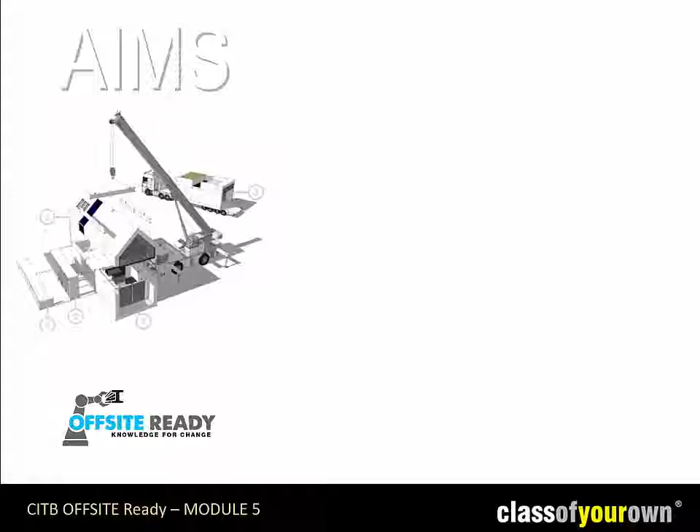The outcomes behind this module are to enable students to understand what AR and VR are, and then we're going to look at Sefaira, which is a sustainable environmental program.

The objectives regarding VR are to understand what the origins are, to explain how virtual reality works, and to demonstrate the benefits.

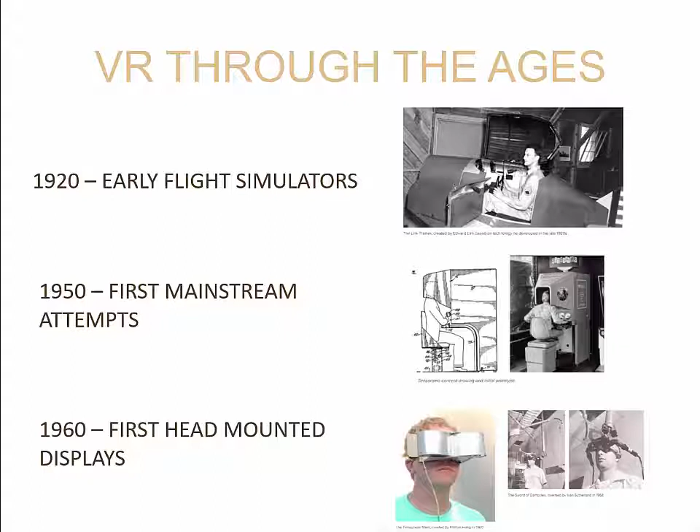This was developed for the first mainstream attempts back in 1950. Then in the 1960s, the first head-mounted displays started to emerge. But it didn't really become a real thing until the 1980s, and then that evolved into VR and gaming in the 1990s.

And finally, rapid development started very much from 2000.

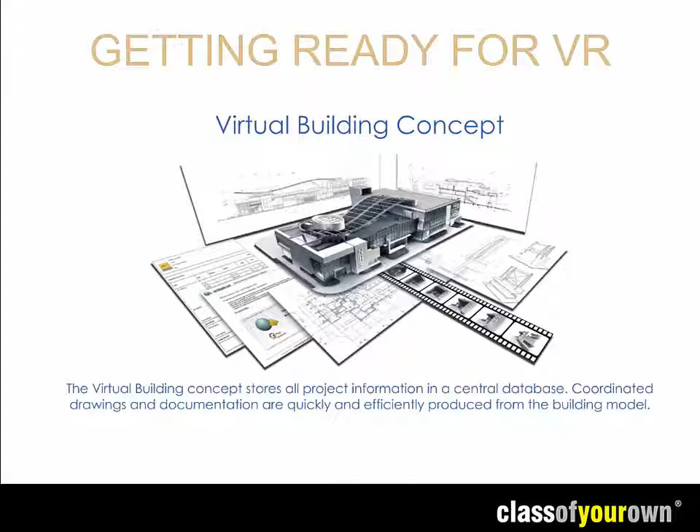So why do we use it? Well, we have the virtual building concept, where no longer are we relying upon 2D illustrations to communicate our ideas. Now we can take our models and provide the facility for them to be explored both externally and internally as a way of communicating information.

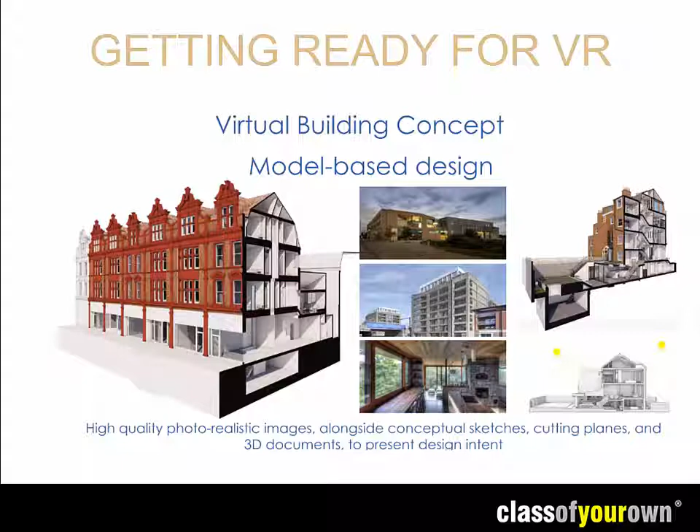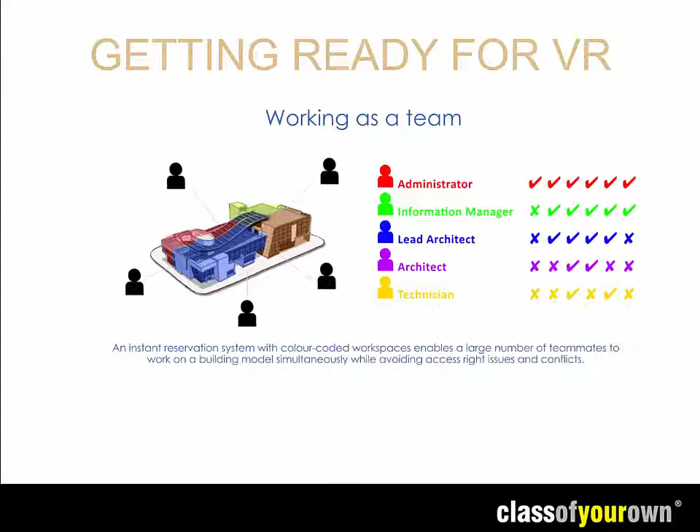In this real-time collaboration, what do we need? Obviously we need the BIM cloud, but more importantly what we require is a team, consisting of the designers, the engineers, and the client. So no longer do we need to work in independent cells, we can work in a group from anywhere around the world.

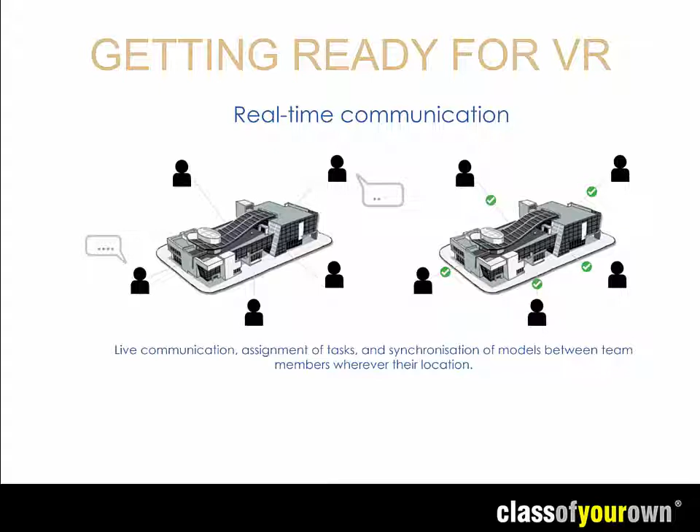So how's this working? Well, we have various options of how we can communicate. The simple one is the Google Cardboard box. There are good elements behind it: it can be easily branded, easy to share, and it's ideal for clients. The downside, however, is that it requires a smartphone, there's no audio, and it's cheap - it's entry level.

Stepping up a gear, we have e.g. Gear VR. These cost around £150. The good element is that they are lightweight and easy to use. We do have a wide angle view, but the bad side is that it's still relying upon smartphones for the ability.

More sophisticated versions are the headsets, where we have built-in audio, high quality images, and it's easily interactive. But the situation is it is tethered to a PC, so it's not so flexible, and it only works on a PC.

So what do we mean by QuickTime VR? Literally, it's a type of interactive movie that supports the QuickTime file format. We have two types: panoramas, where we have a single view and the environment is revolving around us, and the other option where we have movement, so the camera moves around the object, allowing fly-throughs and going in and out of buildings.

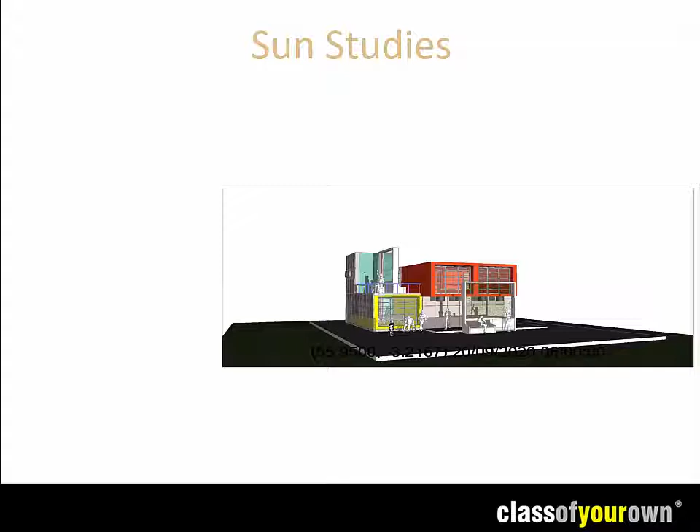More sophisticated developments are where we can take our model and start creating sun studies. By setting up our settings and moving around, we can simulate the daylight so that we can check out how our model is set up regarding how light penetrates the building, and not only that, but how the building impacts the neighboring properties.

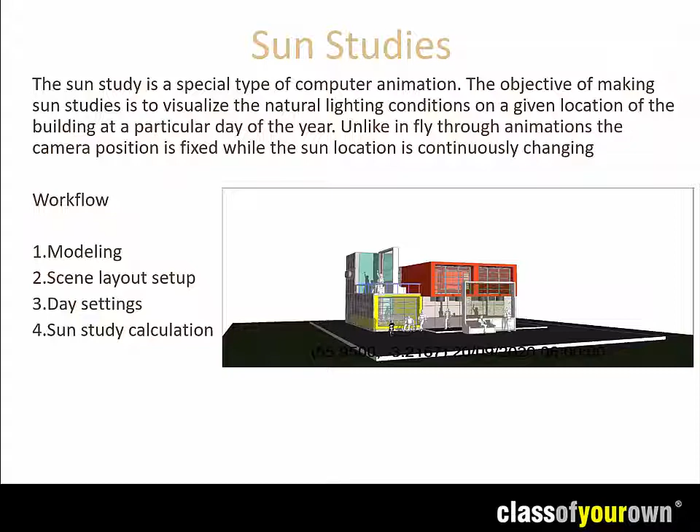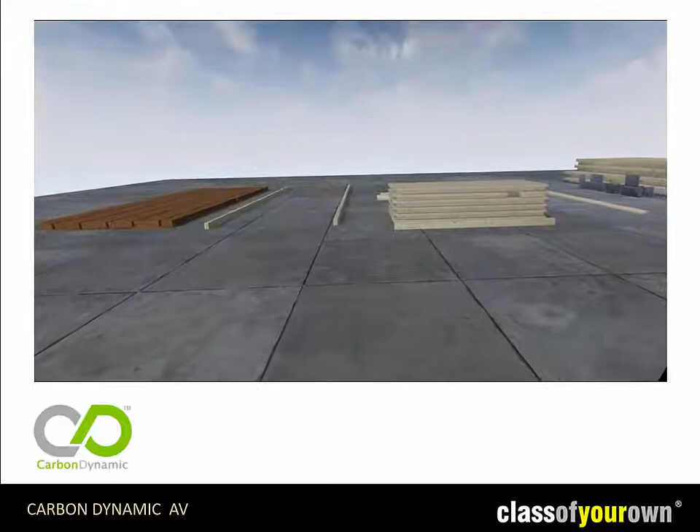Before we move on to part 2, I've included information from Vimeo videos which have been created by Carbon Dynamic. The principle behind each video is to illustrate the process that they incorporated in order to try to create their offsite.

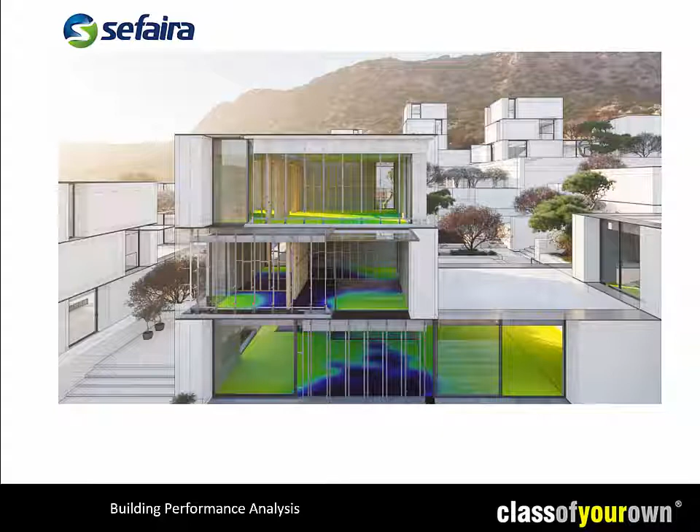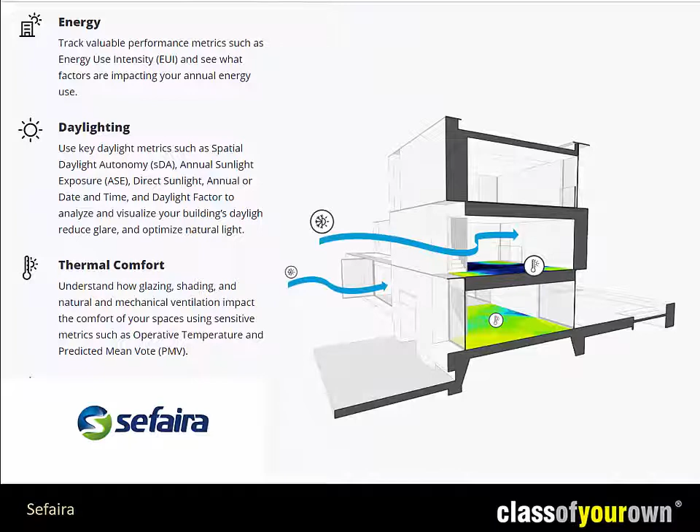So, Sefaira. Sefaira is an application that works with SketchUp. It also works with Revit. The principle behind Sefaira is to enable us to make building performance analysis, so we can make smart decisions from the early stages of our design right the way through to completion. So we can analyze the energy, we can analyze the daylight, and we can analyze the thermal comfort.

So the whole principle behind analyzing is that we need to simulate early and analyze often. The study enables us to make decisions regarding the alternatives available to us.

Sefaira is part of Trimble. There is a direct link to learn.sefaira.com, which takes you through the process of first how to set Sefaira up and embed it within your SketchUp and also with Revit.